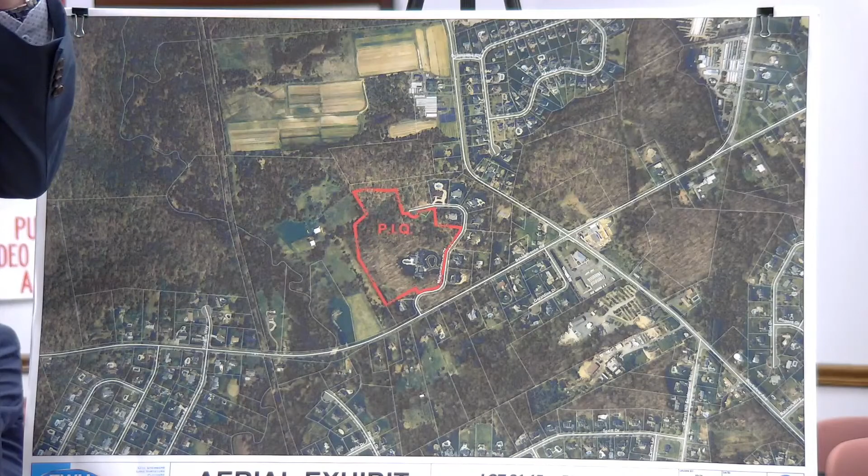We have a relatively simple application tonight. It's block 60, lot 21.15, in the Majestic Woods subdivision. Majestic Woods Drive runs through the subdivision off of Schoolhouse Road. The property in question is a single lot, indicated in red, this is a Google Earth aerial shot, Exhibit A1. As you can see, we have residential uses all around us, and the lot is obviously substantially oversized for the zone.

What we're proposing is to create 3 lots out of that single lot. We have no construction being proposed with this application; everything exists today that's constructed. The single-family house is going to remain on the larger lot. Then we have a subdivision of 2 smaller lots, and those lots will be solely for the existing drainage basins that are on the site. We're proposing to dedicate those basins to the township. Obviously we need council approval to do that, but that's why we're here tonight, is basically to subdivide those lots off.

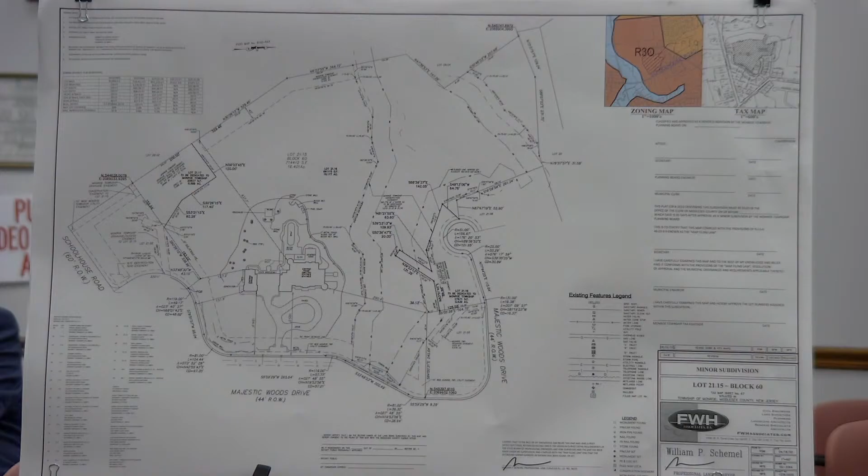As I indicated, there's no construction at all proposed with this application. The lot that has the house on it will be fully conforming after the subdivision, no variances, no waivers associated with that single-family residence. The variances proposed tonight are associated with the basin lots. So the 3 lots are lot 21.17, which will be a basin lot. Lot 21.18 will possess the existing home, and lot 21.19 will be the other basin lot.

The variances that we're proposing are lot area: 30,000 square feet is required. On lot 21.17, 25,627 square feet is proposed. And for lot 21.19, 27,671 square feet is proposed. Again, these are not building lots, they're just basin lots, stormwater management.

Lot depth, 200 feet is required. Lot 21.18 has 125.58. The frontage along the street for lot 21.17 is off of Schoolhouse Road through an access easement that goes back to the property. We propose to maintain those access points, but it doesn't have frontage on the street. But again, as I indicated, this is not the building lot, simply a stormwater management lot.

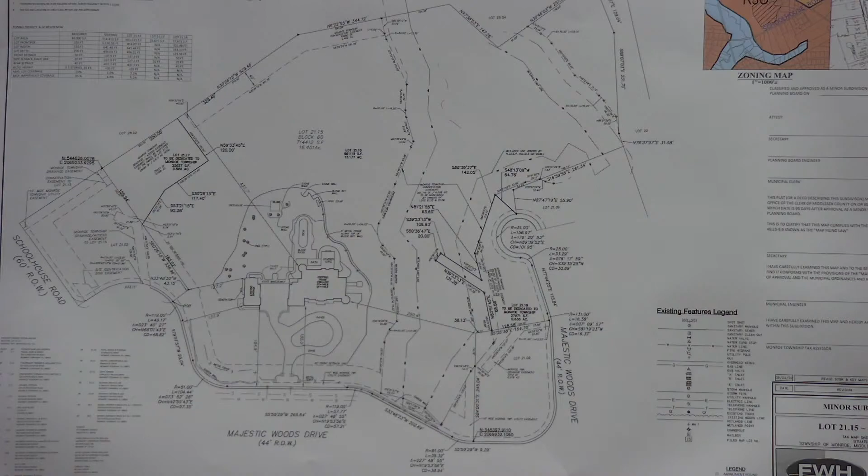Thank you, Mr. Murphy, for listing the variances. As you know, the no street frontage is more like a statute requirement, and one of the reasons is to make sure emergency access is always available. In your professional opinion, would that be provided with this lot?

The next question I have is, with the proposed lot numbers, I would recommend that be approved by the township tax assessor, just to make sure. And lastly, this subdivision is going to be filed by deed, is that correct? We may do it.

Either way, I think that would need approval from the board engineer as well as the board attorney. All right, thank you, that's all I have for now.

Mr. Chairman, the board's in receipt of my October 13, 2022 review letter. Just for the record, Ryan, you're agreeable to meet all the comments in my review letter? That is correct. And if this board approves the application, it's subject to council approval for the dedication of the stormwater basins to the township. That's all I have.

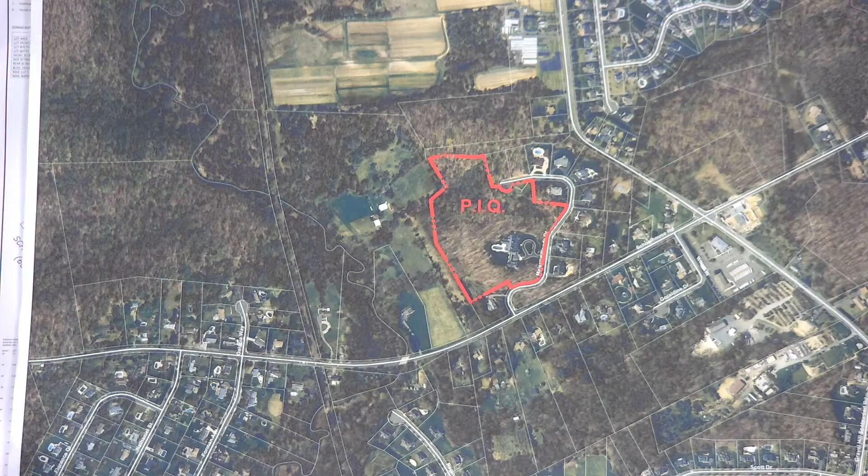Mr. Chairman, I'd just like to clarify that in the event the Township Council does not approve - which is probably not very likely, but in the event that may occur - I wanted it understood that this approval for the subdivision would not in any way allow for building on the two new subdivision lots. It's meant to be for the basins. There will be no building on those two lots in any way, shape, or form.

Anybody else? Do I have a motion? I would move to approve - sorry, open to the public. Any members of the public wish to be heard on this? Hearing none, do I have a motion?

I make a motion to accept the application as stated. Second?

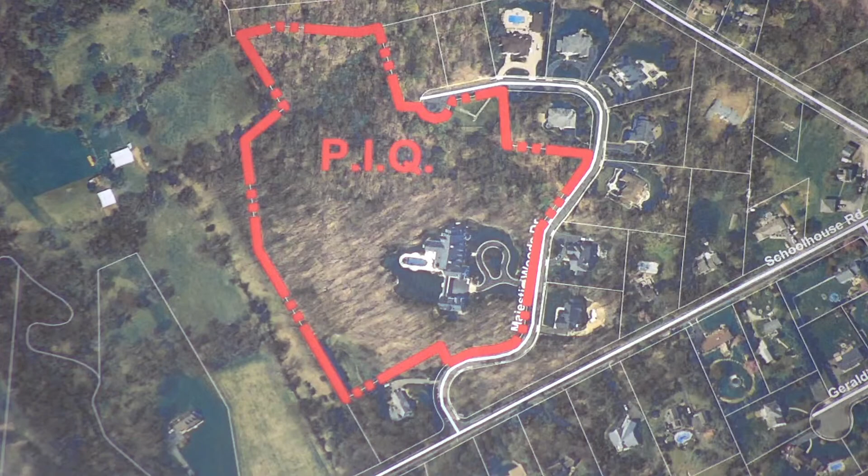Okay, the next application on the agenda is PB 1246-22, Apple Realty LLC.

Good evening, ladies and gentlemen. My name is Rosalind Westlake. I am here on behalf of the applicant, Apple Realty LLC.

With your permission, may I sit down? I'm sorry, I didn't hear you. May I sit down? Yes, please. We should hold off all those people coming in.

Thank you so much for your time this evening. We are here for a minor subdivision, although it looks like a humongous application. It really isn't—we are taking an existing functional shopping center that also has an office building on it and seeking to separate the two uses into two lots.

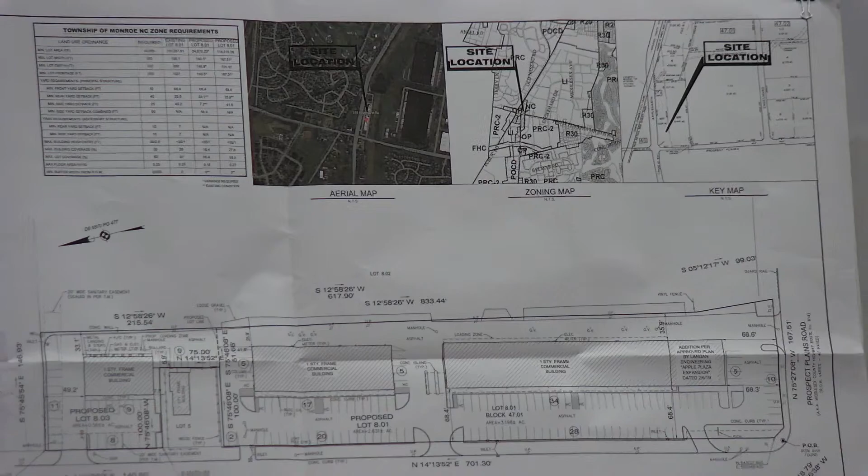Can you please give the board the benefit of your educational and professional experience? Sure, I graduated from Rowan University in 2006. I've been a licensed professional engineer for the past 8 years. I've appeared before approximately 50 boards on 250 applications, not before this board, but before the zoning board in Monroe on multiple occasions. Okay, unless there's any questions, I'll approve his credentials.

Great, thank you so much. Okay, so Mr. Wilder, can you let us know you're familiar with the site and the application and plans? Yes, I am. Okay, you prepared the plans? Yes, I did. Could you describe the existing conditions for the board, please?

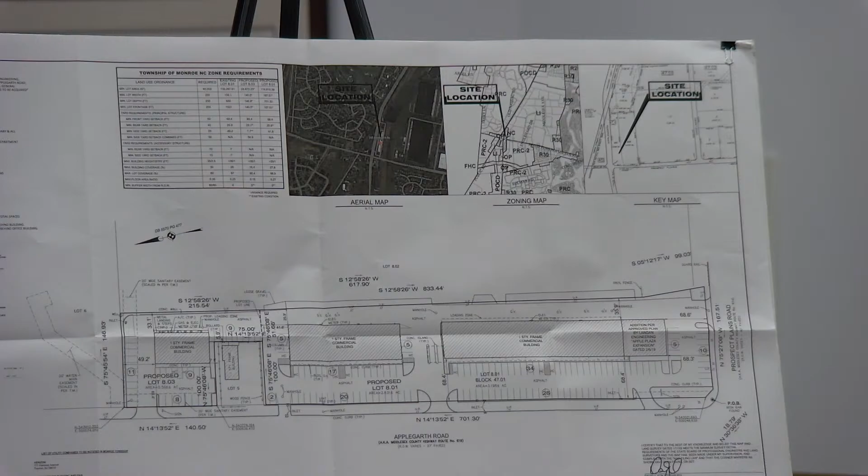Sure, and I have one exhibit that I plan to reference this evening, which I think makes it a little bit easier. I'll mark it as A1, for today's date.

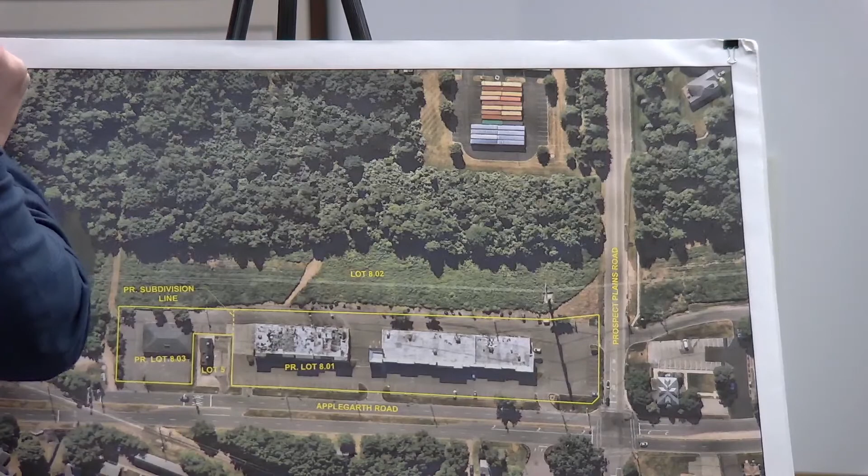This is an aerial exhibit prepared by my office dated 10/5/2022. This shows an aerial of the property. I've highlighted the site in yellow. These are the 2 retail strip center buildings on the south side of the property, and this is the office building we're referencing.

Ms. Westlake had referenced a sort of irregularly shaped portion of the property. You have a horseshoe in this area where it wraps around another adjacent property, lot 5. So what we're looking to do is drop a new property line separating the retail portion from the office portion.

There are no improvements proposed as part of this development. For what it's worth, when we prepared the subdivision plan, as this board may recall, there was a prior approval memorialized in 2021 for a slightly over 4,000 square foot addition. We've prepared all of our calculations, parking, coverages, assuming that addition was constructed, as that would be the highest intensity of development. So if the addition was granted and the lots were subdivided, the variances we are seeking this evening would be subsumed into that proposal.

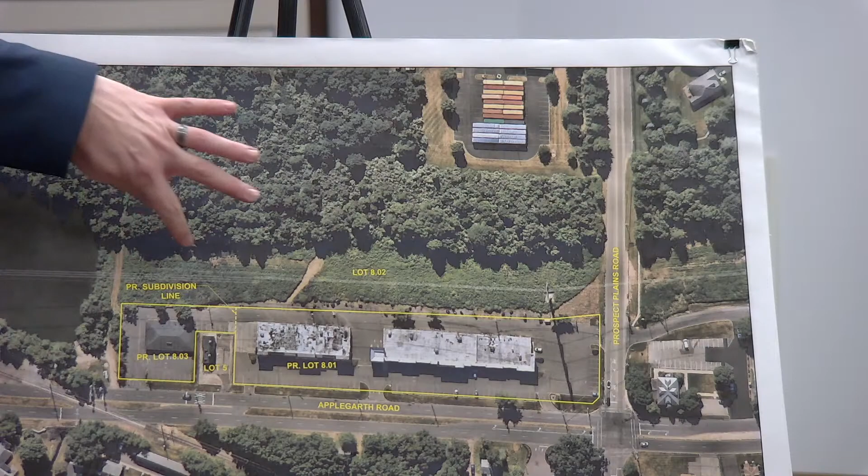So you can just highlight the line we would like to draw for the board. See this little dotted line right here? It's on the right side of lot 5, just extending that line straight up.

As a result of separating off the office building from the 2 shopping center buildings, that does have a little bit of an impact on the parking calculations. It impacts it in that it transitions where the parking falls. The number of parking spaces does not change, but it creates a surplus of parking on the office building and a shortfall of parking on the retail portion of the property.

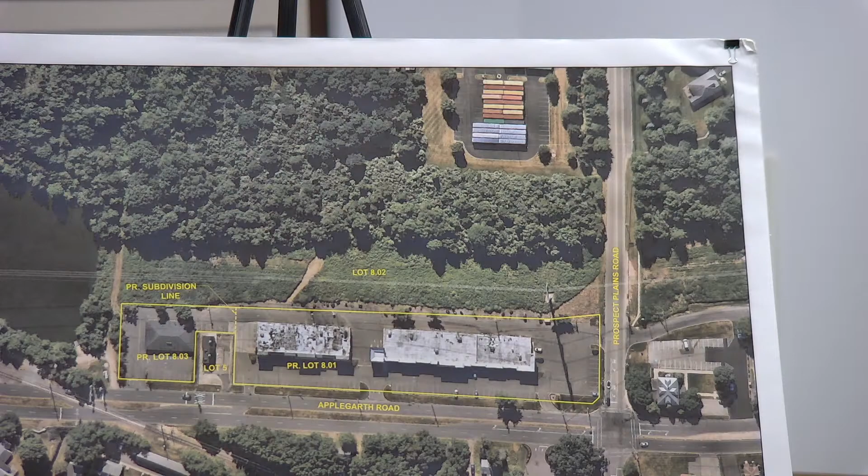Have you reviewed the staff reports from Mr. Rasimowitz and from CME? Ms. Aft is here from them. I have, and from the Environmental Commission as well. Can we comply with all the recommendations in those reports? Yes, we take no issue with those recommendations. In particular, I'll let the board know we are more than happy to do the cross-access easement recommended, as well as the shared parking/parking easement recommended by the planner and the engineer.

Do you have anything further to share with the board at this time? I don't. From an engineering perspective, it's always nice to say nothing's proposed. Okay, unless the board has questions for this witness, I'll move on to the planner. Professionals, do you have any questions? Thank you, Mr. Chairman. The board is in receipt of the November 3rd, 2022 engineering review letter.

The applicant has agreed to meet all the comments in that review letter. They have asked for waivers on submission of stormwater reports and traffic impact statements. I would concur with the waiver since they're only striking a line for financing purposes, and there's no impact to the stormwater or traffic. They've agreed to provide cross-access easements on both properties, and the proposed lot numbers need to be approved by the tax assessor. It's in my letter. I know there was some discrepancy on the plan as opposed to proposed lot numbers. Yeah, we'll do whatever the tax assessor says. That's really it. They've agreed to meet the comments in my letter.

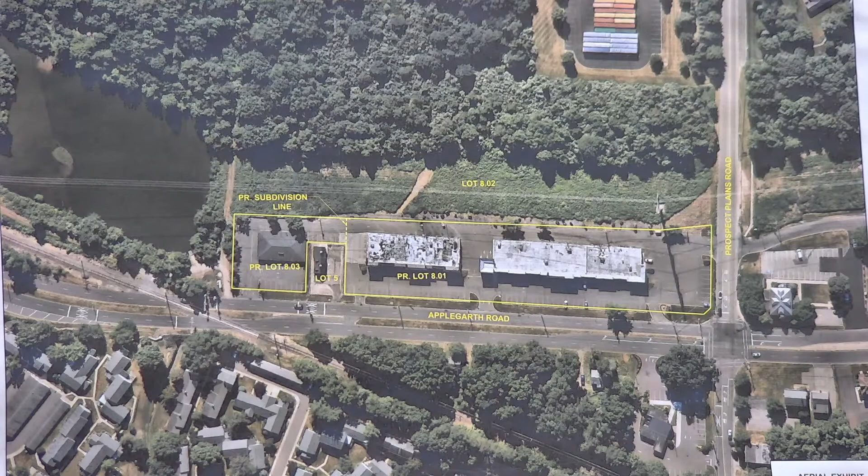Mr. Pelori, yes. Mr. Rothman, yes. Ms. Polidoro, yes. Ms. Brodsky, Mr. McGowan, yes. Mr. Patel, yes. Councilman Van Zorif, yes. Mr. Markel, yes. Chairman Gaffney, yes. Thank you very much.

Okay, I'm going to call the last application, PB 1247-22, and for purposes of full disclosure, in my practice I've had several cases with Mr. Lonsky's firm over the years, particularly with partner Mr. Shipers. I don't believe it creates any issues unless there's any objection from members of the board or Mr. Lonsky. Absolutely not, thank you.

Good evening, Mr. Chairman, members of the board. We're here on the application presented on behalf of Farrington Boulevard LLC, which recently purchased the property on the corner of Farrington Boulevard and Perrineville Road, which I know has been before this board in the past with other proposals. We're here to seek preliminary and final major site plan approval to construct a contractor storage facility on the property. There is an existing stormwater management detention basin on the site, and documented wetlands and conservation easements that constrain the developable area. The applicant seeks several variances and design waivers, many of which result from the shape of the lot, and also the fact that it's a corner property, so you're measuring off of both ends. But we'll provide that detail for you.

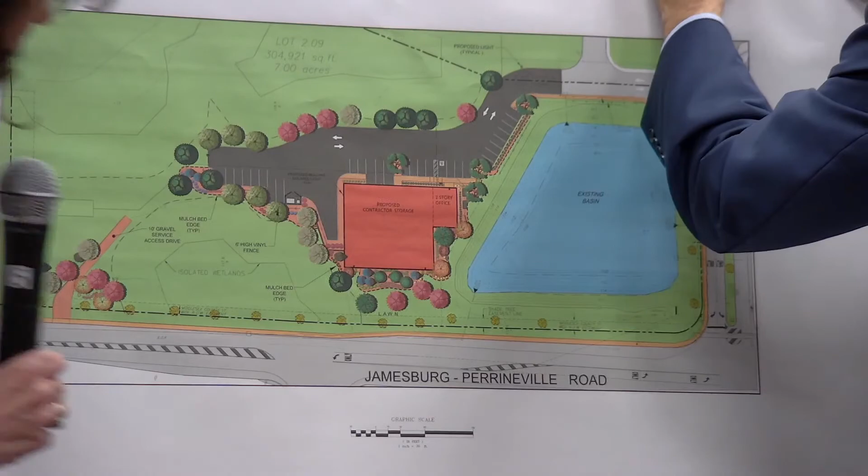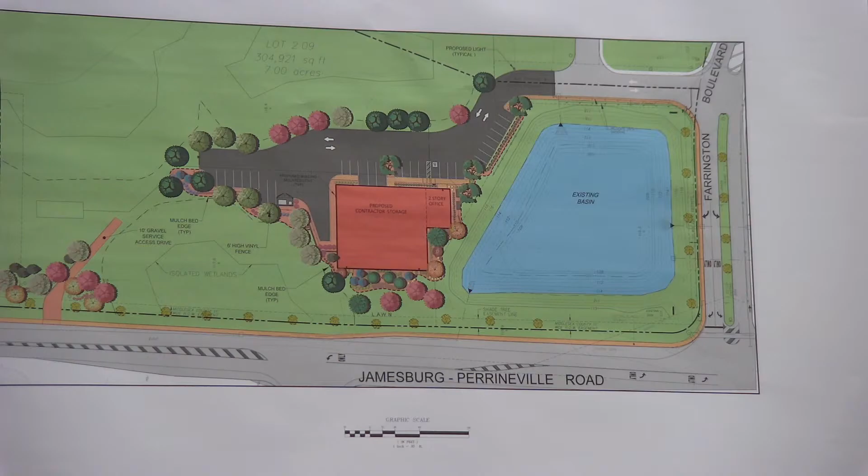I agree. Thank you. Okay, so I do have one exhibit that's not submitted, and that is this plan, which is a rendering of the landscape plan. I'm going to mark it A1. Please make sure it's dated today. I'll put today's date on it, 11/30/2022. The other plans are the paper set that we submitted to the board. Do you want them marked, or are they already an exhibit? If you're representing that it's exactly what was already turned into the board, I think that it's acceptable. Yes, it is. All right.

Can't do this by memory anymore. Okay, so the site is known as Lot 2.08, Block 8, and Lot 2.09, Block 8. It is located on Perrineville Road, which is Jamesburg Perrineville Road, along the bottom of Exhibit A1, and also Farrington Boulevard, which is along the right side of Exhibit A1. It is a corner lot. It contains wetlands within wetlands easements, which on my exhibit you can't see very well, but you could if you looked at the existing conditions plan. The lot contains about 7 acres, and about 2.78 of those acres is outside of the wetlands conservation easements.

And it's the wetlands and buffers whenever I say wetlands. Let's see. Located behind it, up to the top of the sheet, is the Monroe Tennis Center. Across the street, almost directly, this is the driveway, one of the driveways to it that you can see on this exhibit, is the Make-A-Wish. It's located in the south central portion, the central part of the southern part of Monroe Township. The lot itself was created as part of a 4-lot subdivision that received approval in 2000, and the plat was filed in 2005, I believe. There's the tennis center, which I always call it, even though it's the Monroe Sports Center, located on Lot 2.10 to the top of the exhibit.

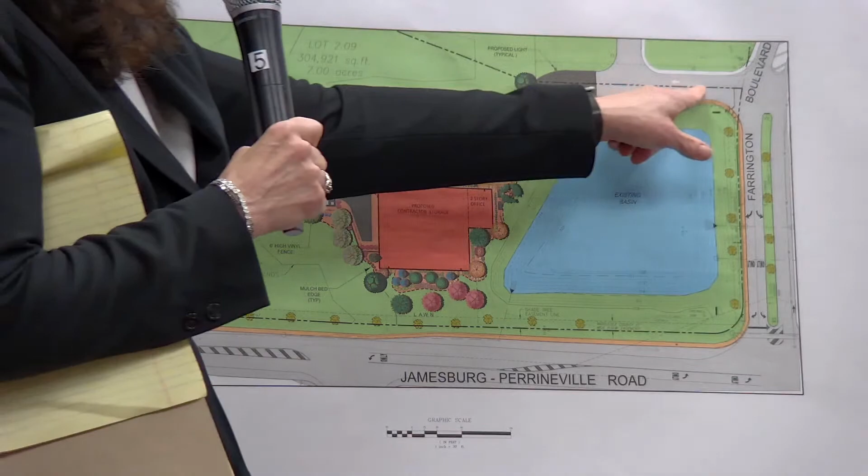There's an access easement located at the eastern side of the property that is split over the property line. You can see the black line, which is the border between lot 2.10, the Monroe Tennis Center, and 2.09, our subject property. There is an easement around that which has recently been enlarged. I'm not 100% sure if it was filed yet, but it's been enlarged to provide better ability for the association to maintain both the easement and the drainage basin, so they could get into it.

The property is quite flat. There's about 4 contours on it. It slopes generally towards the north and a little to the east, and not so much down to Perrineville.

The wetlands encumber the site all along the frontage, except for a little space right next to the detention basin, in front of it, and another little space over in this area, which is where the septic system would be located.

With regard to the proposal, the building is 2,880 square feet of office on 2 floors, split evenly, and the storage space referenced previously of 11,000 square feet. As noted, it's office and contractor storage.

There's parking facilities, stormwater management, landscaping, lighting, and utilities. There is gas, electric, and telecommunications utilities in Farrington Boulevard. There are also dry water and sewer lines. This area has no water or sewer yet, so it will be serviced by a septic system and well water.

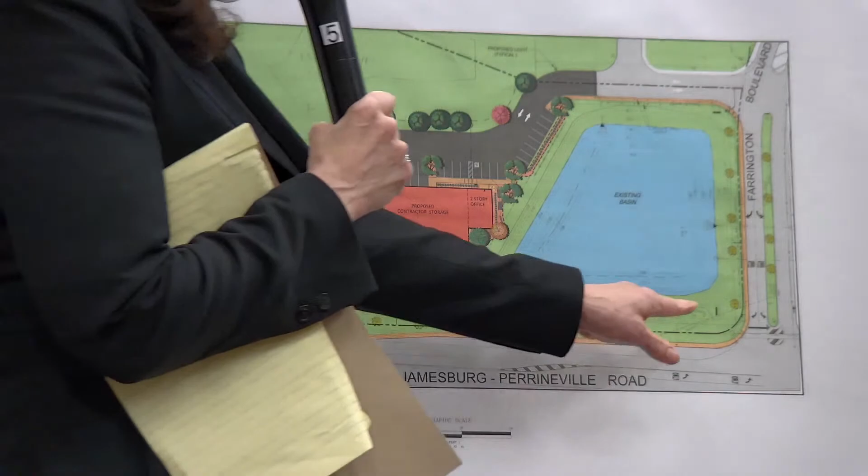There are signs. There will be 3 signs. One will be on the facade, and we're asking for 2 monument signs, one on each corner of the property along Farrington. The first one, along Jamesburg-Perrineville and Farrington, is proposed to be a monument sign listing both the Monroe Sports Center and this business, Tile Works. We've already had a meeting with the owner of Monroe Sports Center, and he's agreeable to that.

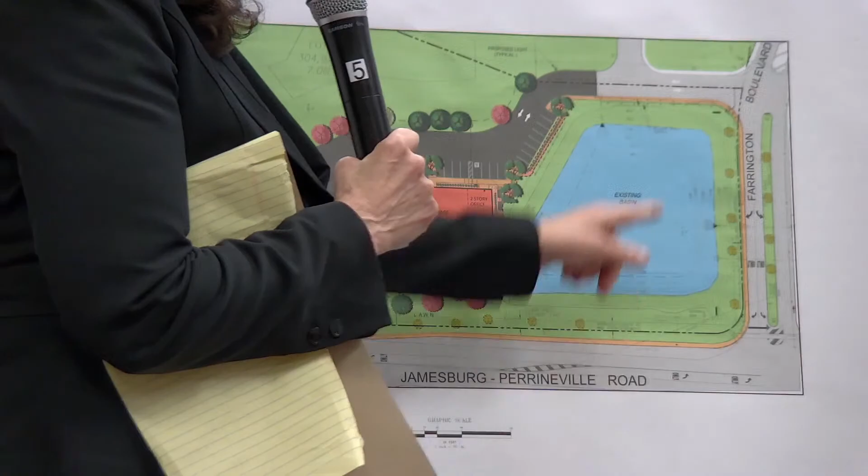With regard to stormwater, as mentioned before, there's an existing stormwater basin, a semi-regional basin. It was actually designed to handle 75% of this lot being impervious, which would equate to about 1.9 plus or minus acres. But we're only having impervious coverage of just under an acre, so this basin has plenty of capacity to handle this development, which it was designed to do.

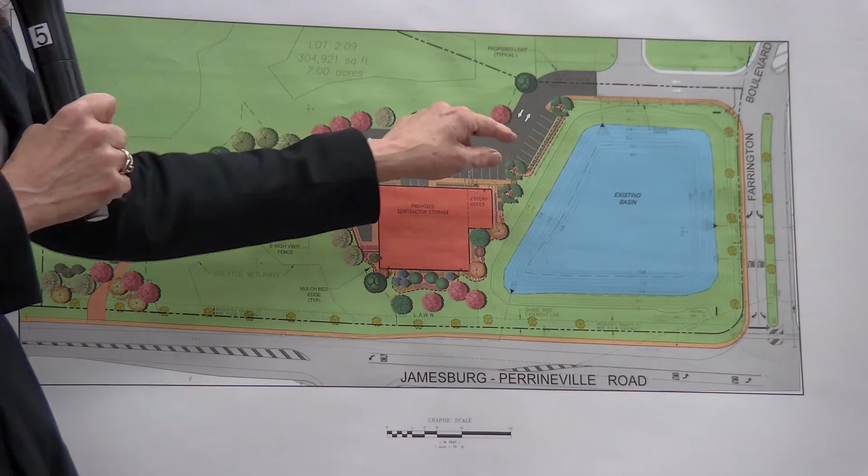One of the new requirements for stormwater management is that if you have a wet pond, it needs a secondary use, such as irrigation. We do propose, though it's not on the plan right now, to use some of the irrigation on site from the pond. The pond was constructed around 2009 and has never dried out - it's in an area where water comes up into it, plus what flows into it, so it's a good pond.

The rest of the stormwater management consists of porous pavement in 2 or 3 different areas of the parking lot, which is meant to provide water quality. Originally, the basin was supposed to provide water quality, but the newer regulations don't want you to do that. So in essence, this site is going to get double water quality - what the basin gives it, plus what water falling through porous pavement provides. There have been a number of studies, and if anyone's interested, the University of New Hampshire has done extensive studies on porous pavement in cold weather conditions, which you might be concerned about.

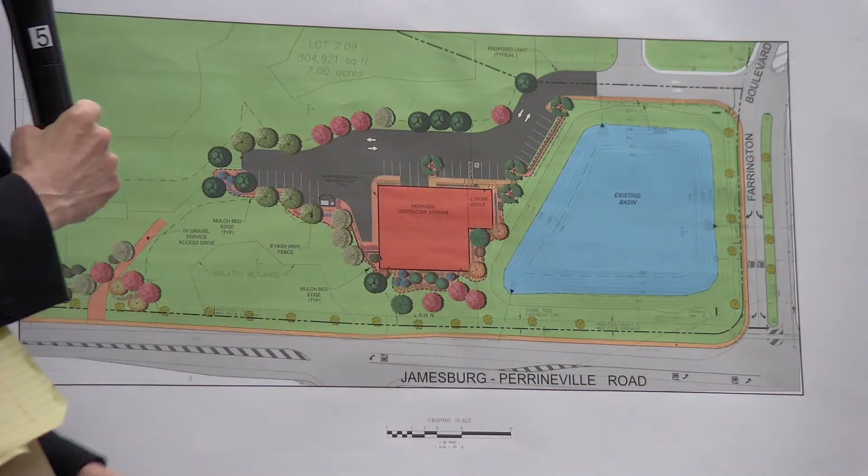Landscaping. As you can see from this plan, we're showing a lot of landscaping around the front of the property in the areas where we can. This area where it looks like there's nothing, that's because it's the wetlands or the wetlands buffer. We provided it to soften the look of Mr. Radosti's very nice looking building, as you will come to find when you see his presentation. As I said, we have a fence in this area to further buffer the street, the people on the street, from the parking areas. The other parking areas are buffered by the detention basin and pretty far from the street. So we feel that the landscaping is adequate.

It's a number of different sizes and shapes, and I can go through the list for you, but they are on the plan, varieties of plants. We haven't gotten shade tree comments yet, but hopefully they agree with our selections. There's some existing landscaping along the street, some street trees that were installed as part of that major subdivision.

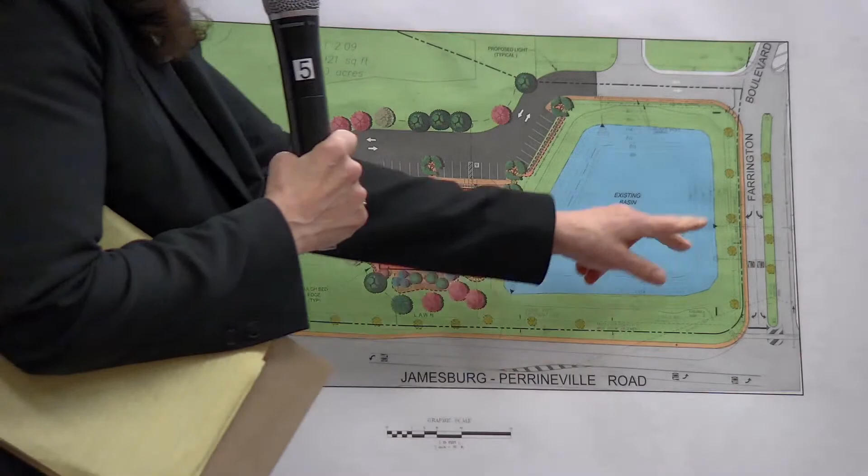With regard to lighting, there are 7 pole-mounted lights, one up on the corner, a couple around the parking spaces, one across from the building, another one down at the end, and there's 4 building-mounted lights that provide adequate light. I did note that there was a concern about the whiteness of the light. White light is 5,000 Kelvin, that's sunlight white.

And 2,700 Kelvin is soft light, the kind you might have in your living room. There's a recommendation to reduce it from, I don't know where it actually is, but it's higher than 3,000, to reduce that. I would like to work with Mr. Rasmussen to come up with the best plan to provide lighting.

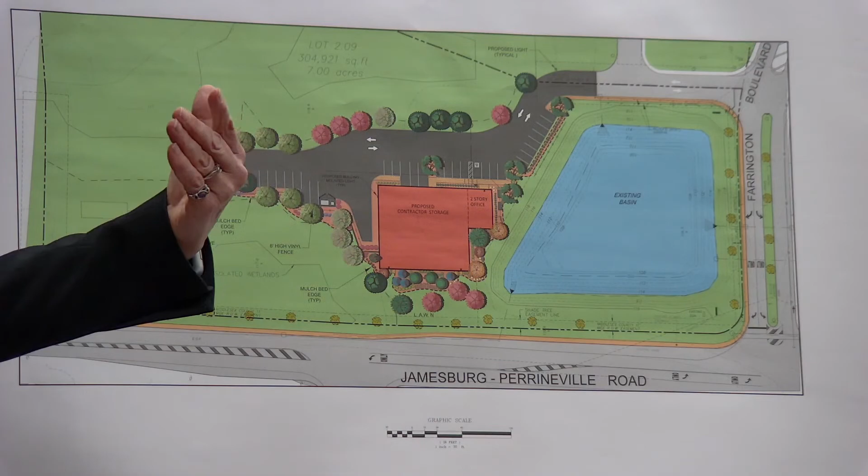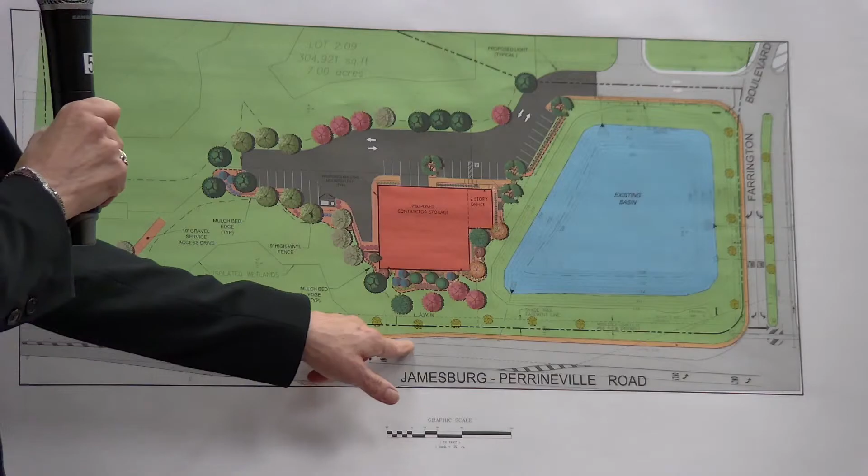Doesn't totally hide the building, but it will enhance it, right? There is no berm here because it's a narrow space, but it does have a lot of landscaping. The area of wetlands is slowly growing up, as you can probably see when you walk by - I'm sorry, I'm not looking down this way very often, my apologies. So I think when you see what the building looks like with the landscaping, it will be very nice. For a person driving along the road right in front of the building, your eye goes up and you won't see anything beyond the building, which will be further described to you shortly. See what we got, thank you. You're welcome.

Chairman, a very quick question. You talked about the soil erosion and sediment control - did you get the DEP permit approved yet? A DEP, we don't need any DEP water management permits. Are you talking about the permit that goes along with the soil erosion? You usually don't do that till just before you get ready to construct.

No, Terry grabbed my berm question ahead of me, so we're covered. Anybody else have a question? Anybody from the public have a question?

Hearing none? Chairman, go. Just to pick up where the councilman and Mr. Rothman left off on berming and landscaping, you'd be agreeable to provide supplemental landscaping upon installation and inspection by our board planner and my office as well? If there's some gaps that we could fill in, sort of enhance that buffer area, since you're not putting a berm in and you're looking for that variance. Yes, absolutely. Thank you.

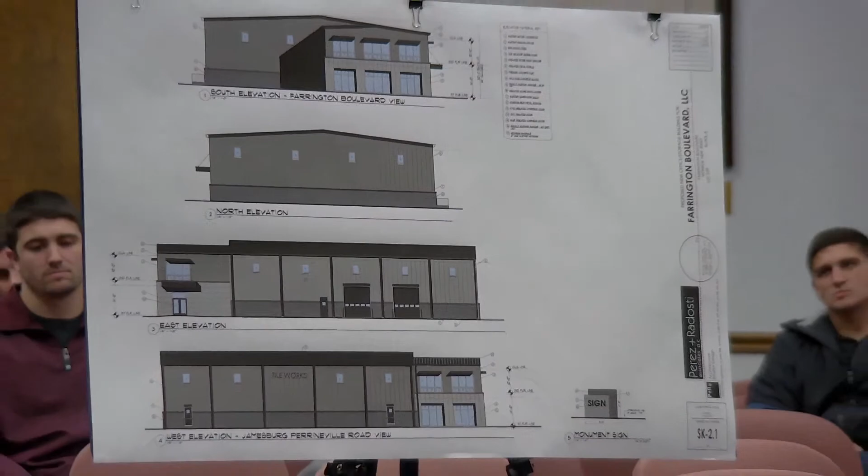And can you give your credentials? Yes, I'm a licensed architect in the state of New Jersey. I graduated from New Jersey Institute of Technology in 1992 with a Bachelor of Architecture. I've been licensed since 1996 in New Jersey. I'm a principal at Perez and Radosti Architects for the last 20 or so years. I've presented in front of dozens of boards throughout the state of New Jersey. I've not presented in front of this board, however I presented in neighboring towns like Millstone, Cranbury, East Windsor, East Brunswick, Manalapan, Marlboro, and many other close towns.

Thank you. Unless there's any objections, I'll accept your credentials. Thank you. Well, what was yours? Well, I have a total of 4 boards. Were these already submitted or are they?

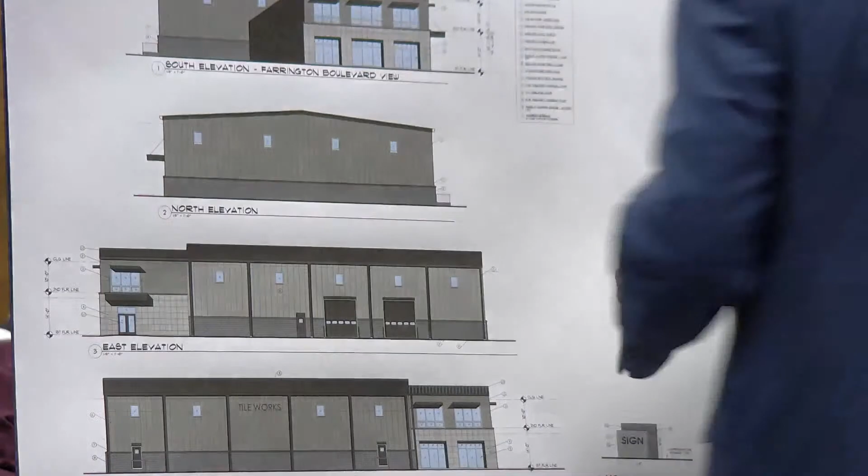Two of them were colorized versions of what was already submitted, and the other 2 are new, completely new exhibits. Why don't we just mark all 4? Okay, you had A1 already - SK 2.1, static elevation, dated 6.8.22 on it.

Have the SK 1.1, colorized version of the floor plans that were previously submitted. Date on those drawings is also 6.8.22.

I have a new exhibit labeled SK 3.1. This is a section and monument sign, and this drawing is dated 11/28/22. That'll be A3.

So the proposed building is an office storage building for the applicant, consisting of 2,880 square feet of office on 2 levels and 11,000 square feet of contractor storage.

The mic he's speaking to is not working. Try the cord at one. This one works. Okay, let's try that. Is this better? Yeah. Okay, all right, let me start over here.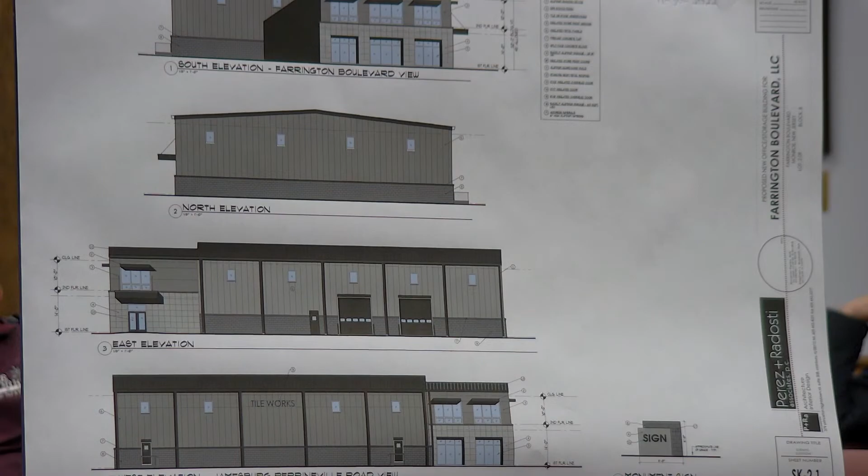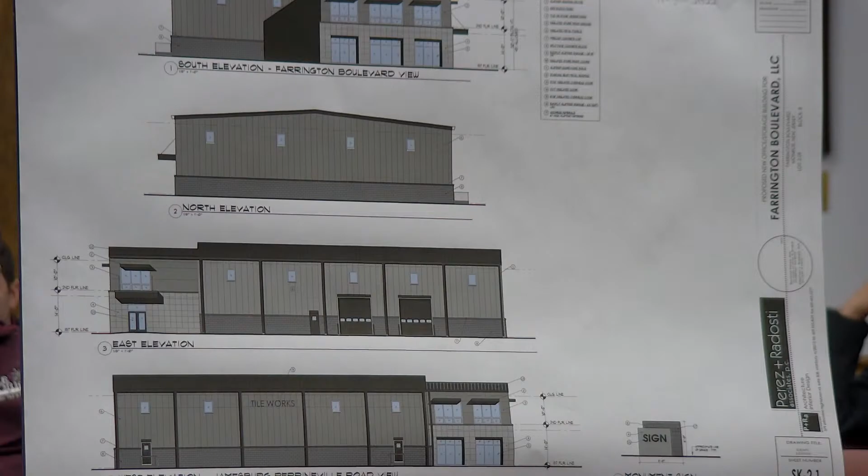It consists of 2,880 square feet of office on 2 levels and 11,000 square feet of contractor storage on 1 level, for a total of 13,880 square feet. The building is non-combustible construction made of steel and concrete construction and is approximately 31 feet tall to its peak. The majority of the building is clad in pre-finished insulated metal panels over a split-face block water table of approximately 6 feet in height. The water table is topped with a precast concrete cap.

The office portion of the building is clad in a tile or stone veneer to allude to the type of business that is inside and to draw attention to the entry area. This office area includes lots of large windows to allow natural light into the space. The upper windows include metal shading devices to keep down glare and solar heat gain in the interior space. The front entrance is punctuated by a large cantilevered metal canopy that coordinates with the metal shading devices.

The storage space includes clerestory windows up high to allow natural light into the storage area, and these windows go around the perimeter of the building. The building has a pitched standing seam metal roof, and all the facades of the building are color coordinated with varying shades of gray. On the west facade of the building, we propose backlit LED aluminum signage of 20 square feet. This is approximately 1 foot 4 inches by 15 feet long.

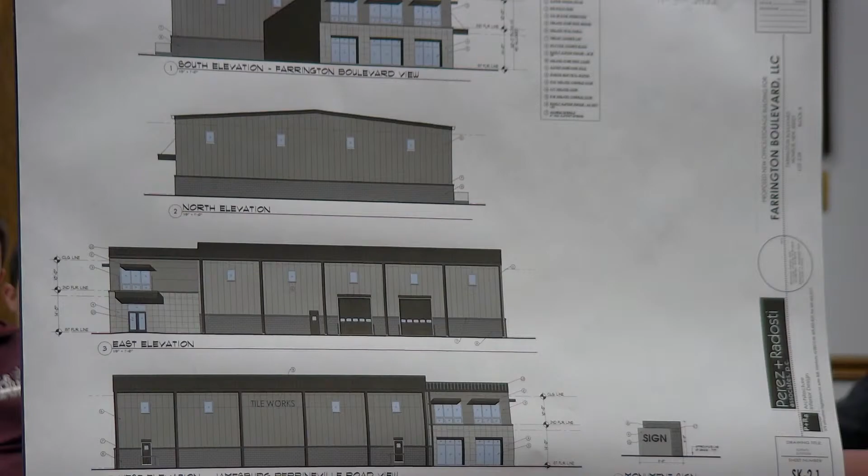So this is sheet SK 3.1.

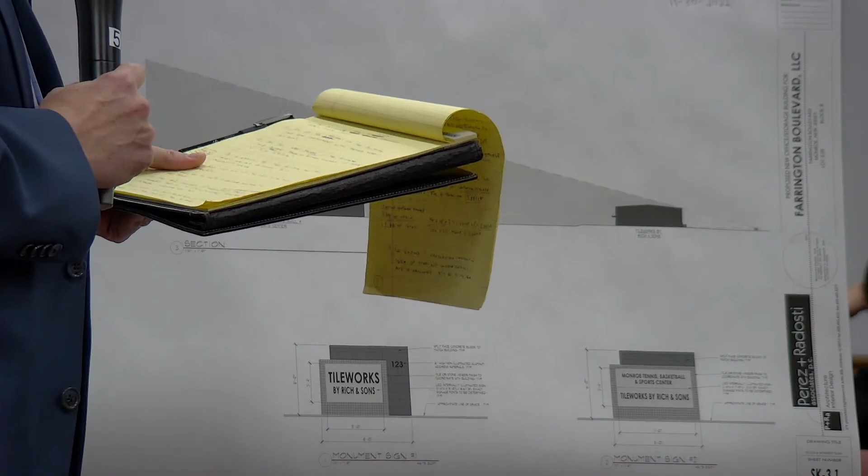A3. So in addition to the building mounted signs, we're proposing 2 monument signs. Both of these signs are the same size and materials. Each sign is 6 foot in height by 8 feet long and shall be 46.75 square feet.

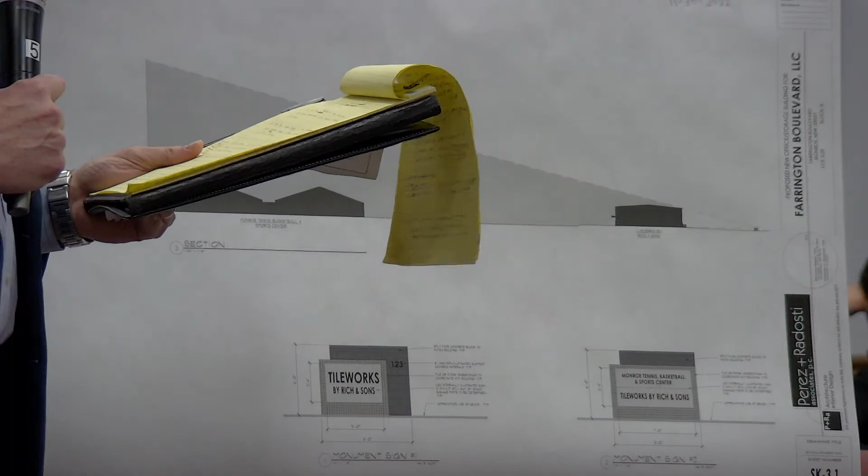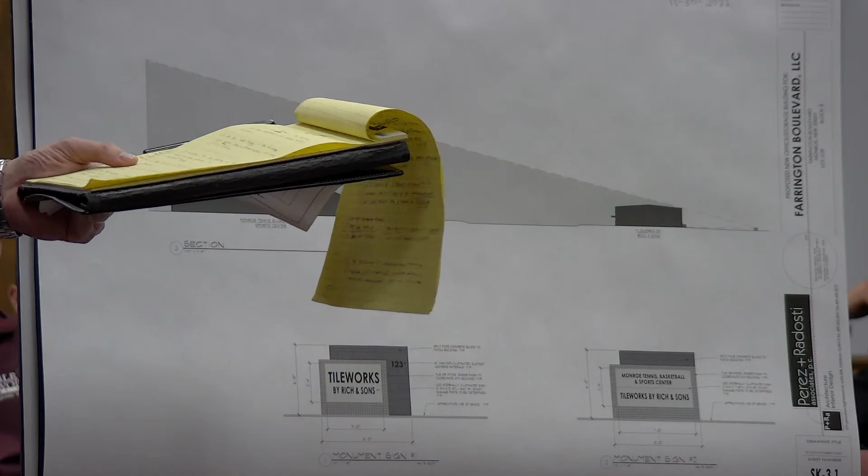So sign number 1 includes a 6 foot high, non-internally illuminated, 6 inch high street address up in the upper right-hand corner here. And then it also includes a 3'4" high by 5 foot long internally illuminated sign box. This would be the sign that would say Tile Works by Rich and Sons. The materials are split face block and tile to coordinate with the look of the building.

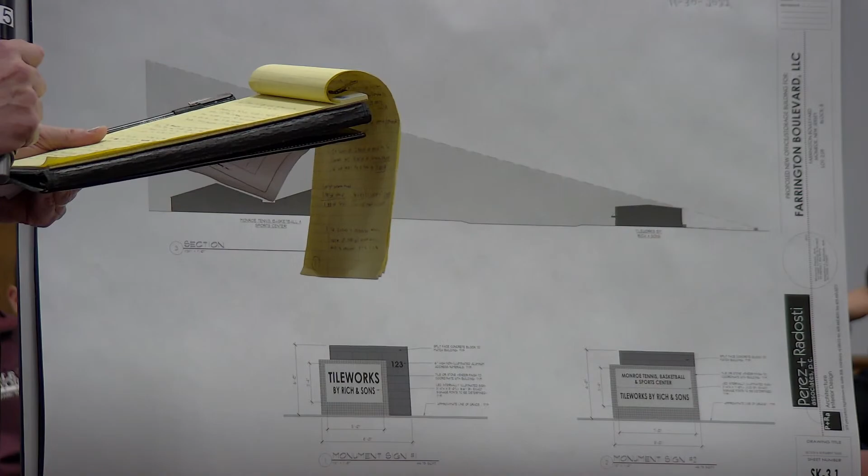Sign number 2 is of the same overall size and materials as sign number 1. However, sign number 2 will include a 3'4" high but 7 foot long internally illuminated sign box that includes a sign for the applicant as well as a sign for the neighboring Monroe Tennis, Basketball, and Sports Center.

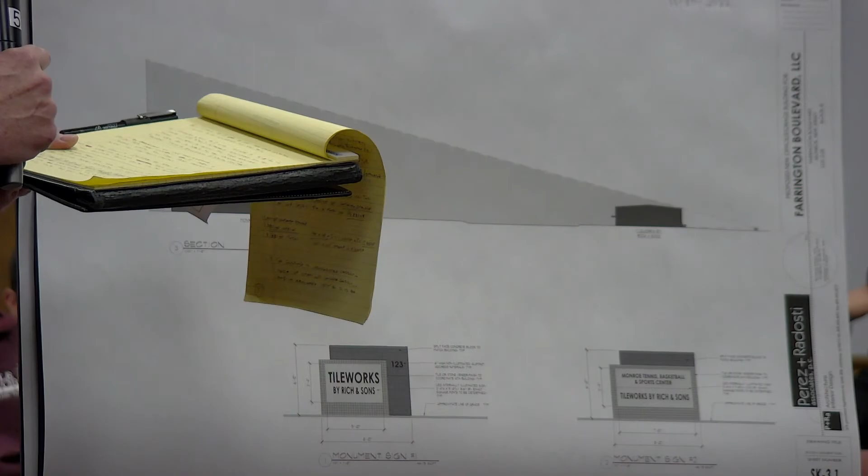As requested at the TRC meeting, I also have on the sheet a scale section cutting through the site. If you see this little tiny car right here, this is a pretty small scale. It's 1 inch is equal to, 1/32 of an inch is equal to a foot.

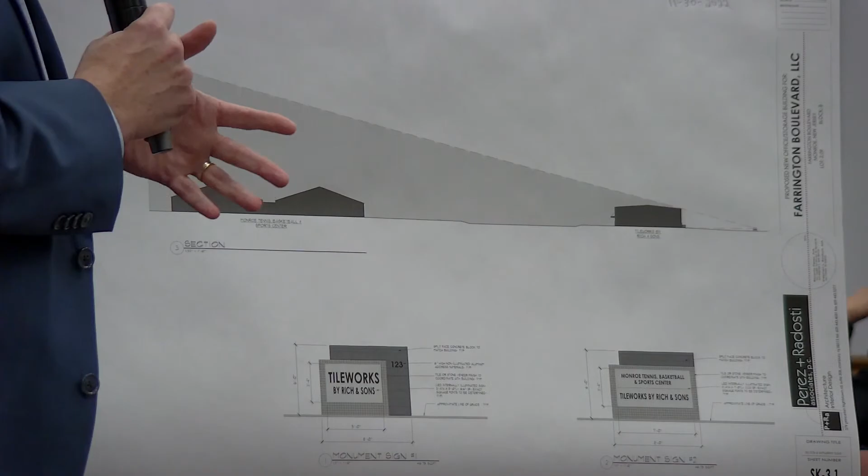So from the car on the road, if you're immediately in front of the building and you looked up towards the building, if you're within the width of the building itself it would block the view of the Monroe Tennis, Basketball, and Sports Center, which is shown here in the back. So it's a scale section showing that.

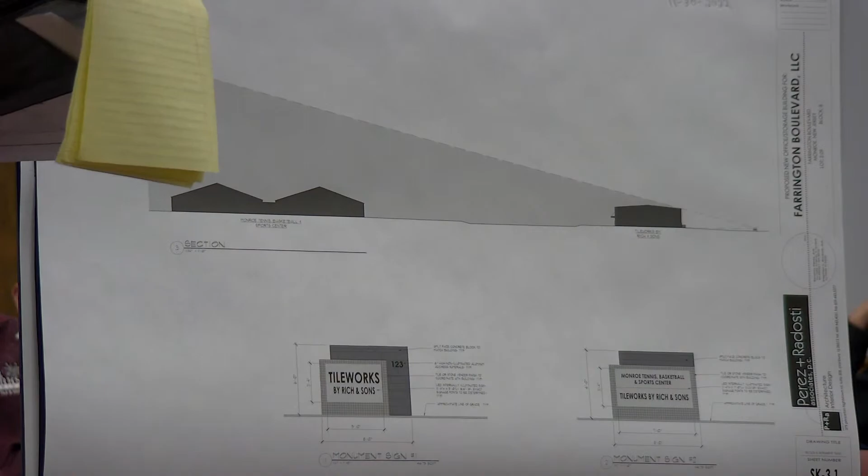So I believe that our building does meet the requirements of the building design standards of section 108-12.3. Most of our exterior materials are mentioned in paragraph E1. However, the split face block isn't specifically mentioned.

However, I feel that the dark gray split face block does coordinate well with the design of the building. It adds a water table that visually anchors the building to the site. The horizontal lines of this rough face of the block contrast nicely with the smooth vertical metal panels to create visual interest on the building. The block is also functional in nature, in that it will provide a strong wall finish at the lower portion of the warehouse that can stand up to more abuse than the metal panels, so it won't get dented or damaged from the inside of the building.

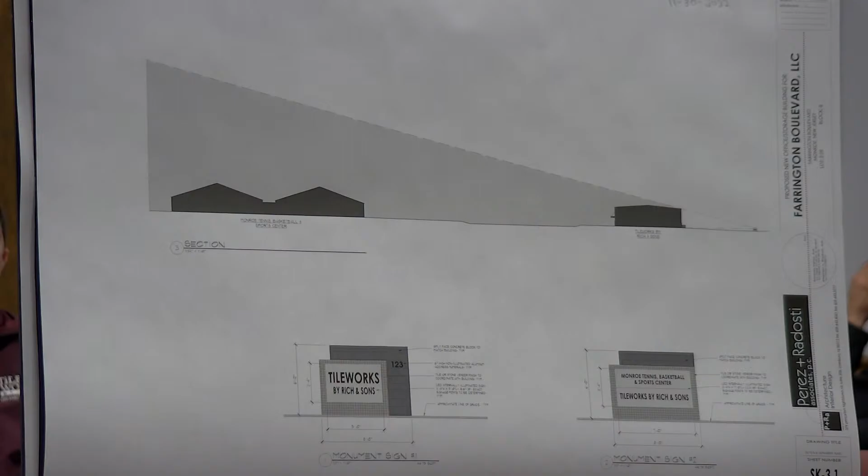I have here some photos of split face block on some other buildings. And this is exhibit A5 with today's date. I just wanted to show that split face block, if used correctly, can be an attractive material.

Here it is shown as a water table. It's actually a dark block, kind of similar to ours, and it's shown in contrast with a smooth material. I think that contrast will work nicely on our building and also provide some function. This split face block is pretty similar to our color also, and it's shown there with gray metal panels, and I think it makes a nice contrast there too. So I think it's the ideal material for this.

So I think that concludes my presentation.

You're able to see what he... I'm going to turn that, or just hop the other side. There you go. Mm-hmm.

Okay, for the professionals, any questions?

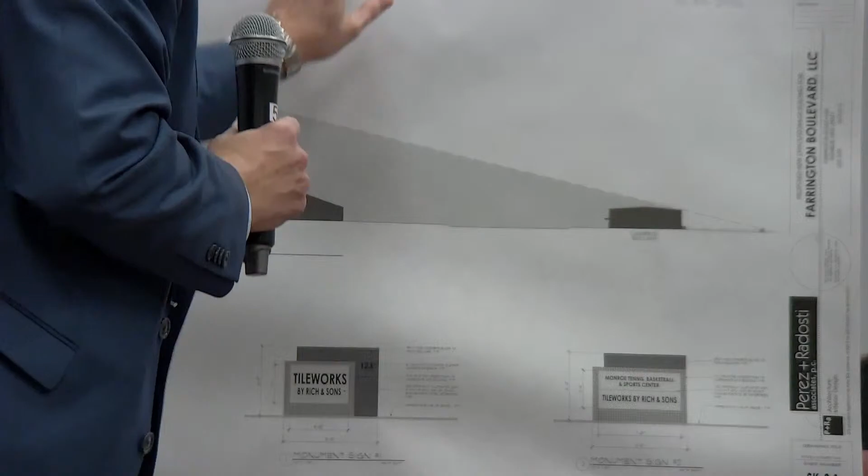Quick question. Could you again clarify where the wall sign would be on the elevation? Yes, of course. I have one wall sign, and it's on the west elevation, and it's facing Jamesburg Prospect Plains Road.

Yeah, so as you go down the street, you would see it here. It's a small sign, it's 20 square feet in size. And that's also, I guess, backlit LED lighting? That is backlit aluminum letters, yes.

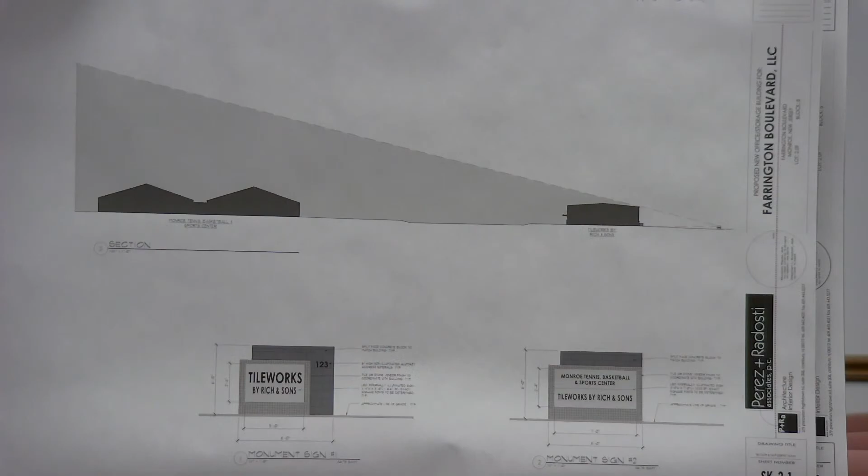So coming back to the point, I think you've heard the discussion tonight. In your professional opinion, given that there is the monument sign that's being proposed at the intersection of Jamesburg, Prospect Plains, as well as the wall sign, which is lit, would that be identifiable enough signage for anybody accessing the property?

Well, I mean, this sign would be the sign located at the corner, and it has a street numeral, so it would be helpful for people for navigation purposes to see the street address as well as for emergency vehicles. It would also have the name of the business, and then once you turn onto Farrington, at the next intersection, there's the second monument sign.

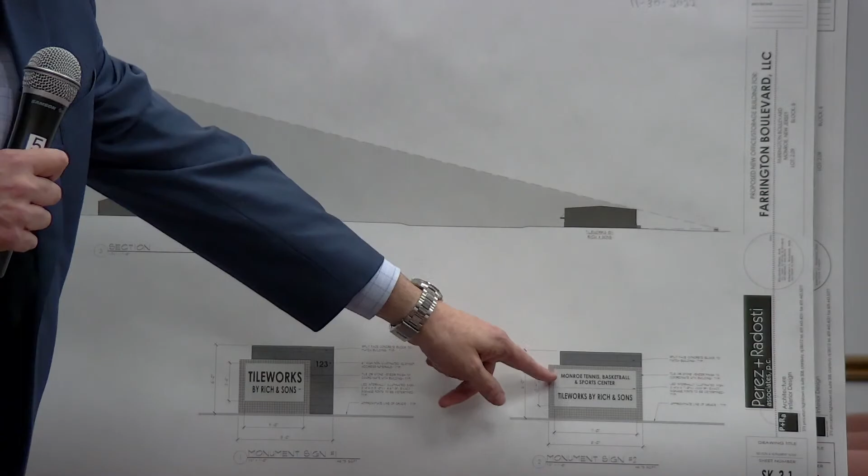This monument sign helps wayfinding for Monroe Tennis, Basketball, and Sports Center, as well as knowing that you would turn in there for the Tile Works project. Okay.

The number 123, that is not lit, right? I just have 123 because I don't know the exact street address yet.

Okay, that's not lit. No, that is not lit. I would defer to the board. However, if the purposes are met with two signs, I would recommend that.

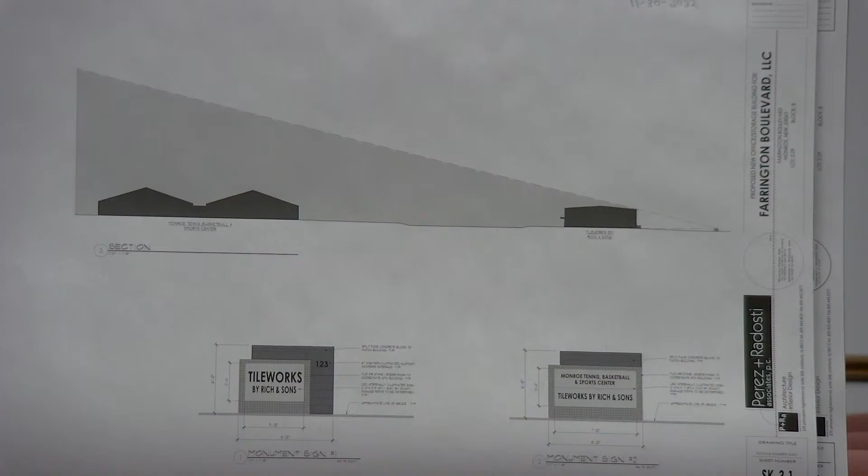In terms of the building materials, thank you for clarifying that. Are there any green building design materials being proposed? There would be green building materials, yes. The building would use some recycled materials, materials produced within 500 miles of the site. There would be LED lighting, low-E glass, and solar shading devices over the windows on the upper floors. We're going to have an efficient HVAC system. There'll be several items.

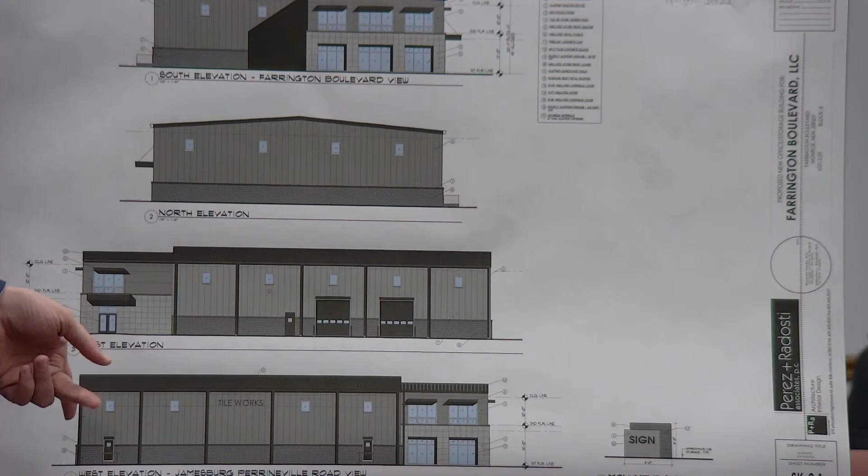Thank you. Where would the mechanical system of the HVAC system be located on the property? In the warehouse itself, that area is going to have heaters inside the building. There will be heat and air conditioning in the offices, and there would be probably a ground-mounted small unit in the rear of the property.

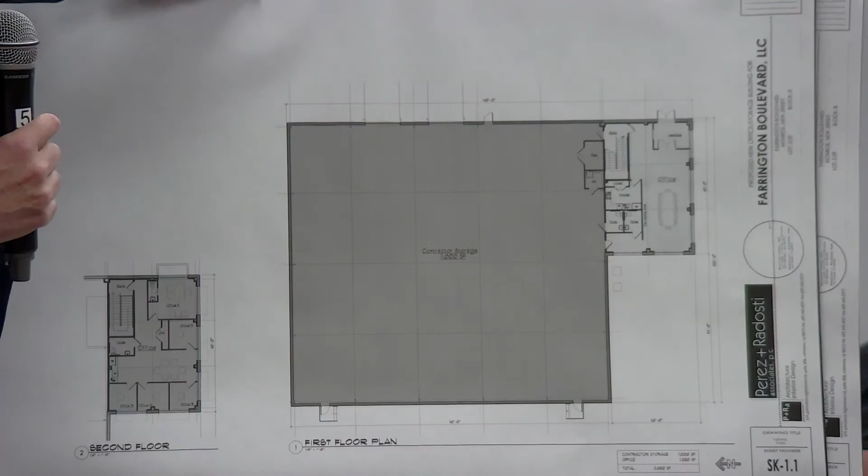Where's that in relation? So somewhere along this area here. The office area is relatively small, the size of a house, so it would be just a small condensing unit.

Is that condenser unit, those two squares shown? Right, here. I would recommend that your office or the engineer's office works with us, because that would be facing the Jamesburg Prospect Plains Road, if some kind of landscaping can be provided around that. Yes, we'll work with you on that. Thank you, Chairman.

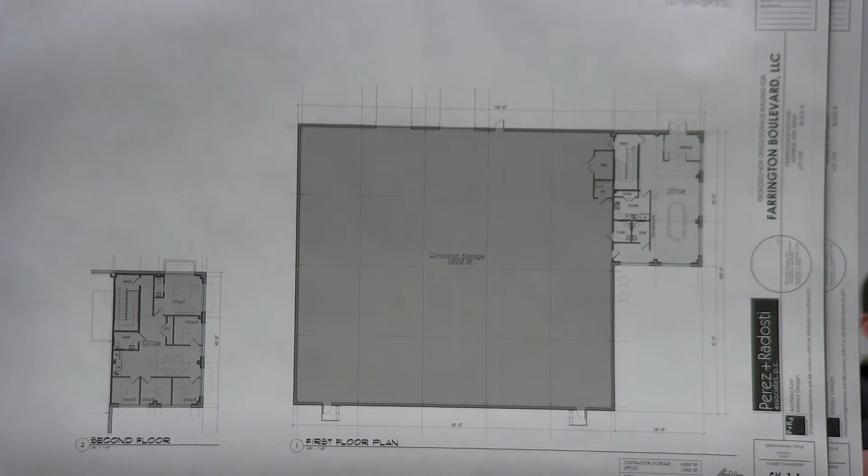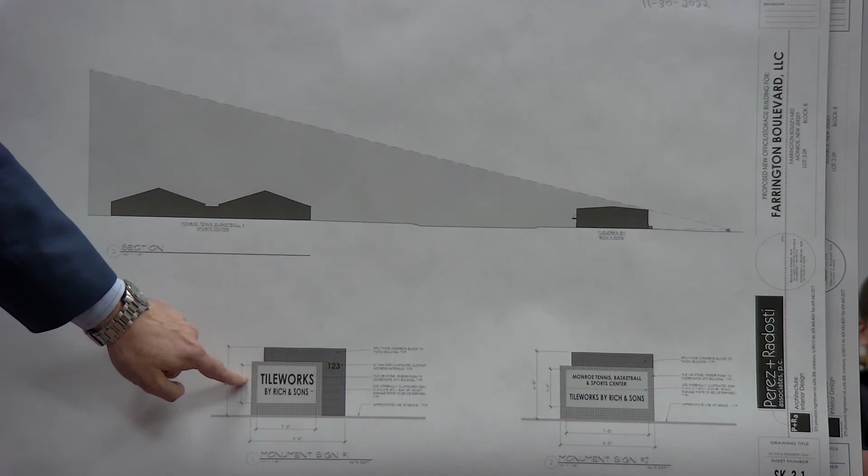So with regard to the signage, with both names on the sign, is that going to be at the intersection of Perrineville and Farrington? It'll have both names, the Tile Works and the Tennis Center, or Sports Center? The one with both names would be at the intersection of Farrington and Perrineville, and the other sign would be on Farrington, correct? I think it's the other way. The sign with two names on it is on the corner of Perrineville Road, and the other one's at the access point, as you come off of Farrington into the driveway. Okay, so let's start with the one on Farrington and Perrineville with both names on it.

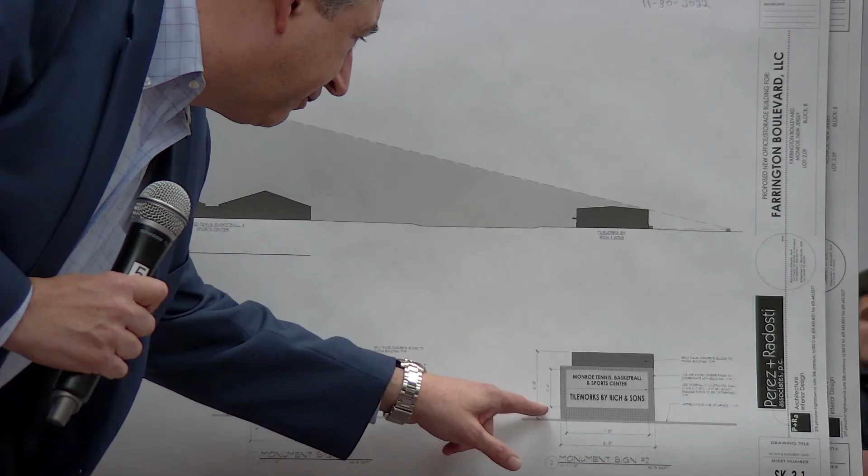Is that area of the sign lit up? Yes, that's correct, it is internally illuminated. So I'm concerned with glare from that light, you're at the intersection and the brightness of that. It's a very large area, I think you said it's 7 foot by 3 foot or thereabouts. Yeah, 7 foot by 3 foot, and I understand it meets the zoning, it's highway development zoning. However, it's Perrineville Road, you're right at the intersection.

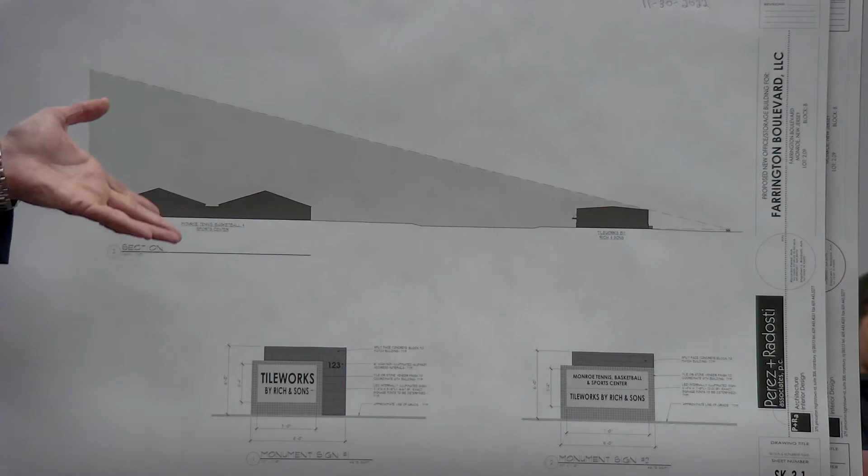Can you tell me about the lighting inside, how bright it is? Is there going to be an impact on the cars trying to make the turn? It would be an LED, internal. It would be an aluminum sign box with acrylic face, and it would be LED lighting, internally lit.

So again, I'm concerned with how bright that's going to be at the intersection, as well as the other sign, the single business sign at the other corner, which looks a little bit closer to the intersection there. Same thing, the brightness of that area. It's a very large sign. Do we need that large of a sign for a business that the public is not coming to?

The public will be coming to the tennis center, of course. Understood. Does the sports center have a sign with their own name on it at the other driveway entrance off of Farrington?

Just to clarify, I asked my client whether or not the sign that only reflects Tile Works, the second sign as we've been describing it, does not have to be internally illuminated. Because we appreciate what you're saying. As far as the other sign, to the extent that you want to work with our engineer or professionals to make sure the lighting isn't too bright, we don't have a problem with that. We can make that a condition that it satisfies the engineer in that regard.

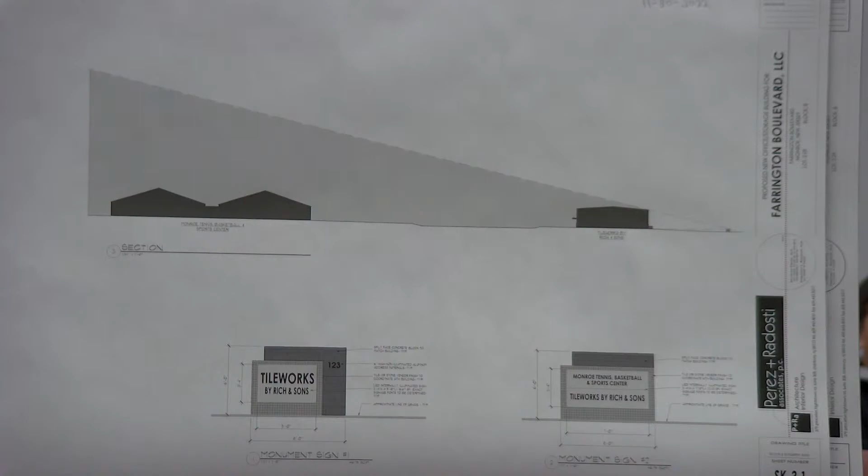But I did want to address one point, and that was the sign on the building, which is facing Perrineville Road. If you're making a delivery and coming from Route 33, where a lot of the truck traffic comes through, up Perrineville Road, by the time you see that sign, you're already past the building. That's why having the sign at the corner makes more sense, that's where the traffic would be turning into the facility. And of course, the signs are for traffic purposes.

I think the relation was that's why the second sign, the one we're calling the second sign - what is that doing if this sign is going to alert truck drivers? It's just directing you into the roadway, the actual roadway into the building.

I don't believe the sports center has a sign at that intersection. Would they go on this sign as well, a second sign? I thought they had a sign there on the other end. They have a big sign - the sports center has a big sign on their building, almost half of the side of the building. They probably don't need a little monument sign because literally half their building is a sign.

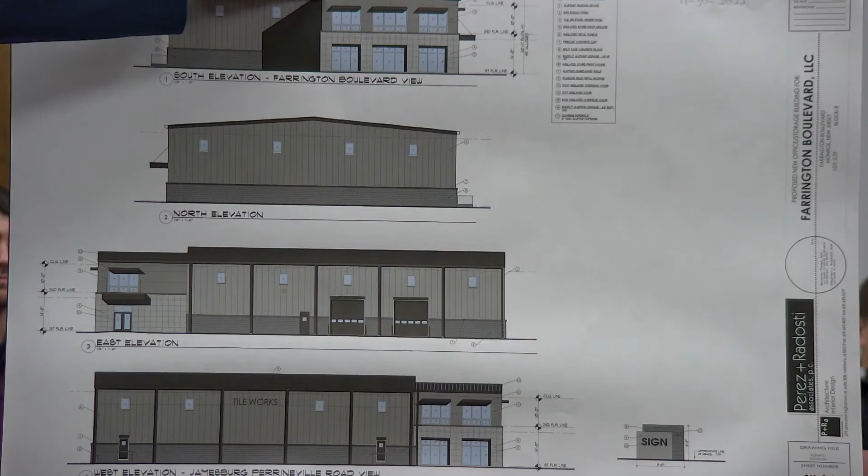Didn't you say one of these signs was replacing their sign on the road? The corner sign? Just to clarify, on this corner there's an existing sign that may not have been previously approved. The tennis center is being asked to remove that sign, and the sign we're proposing would replace it and be on this corner. The tennis center has their signage on the building, so it's very easy to see where they are from Farrington.

But because of the vegetation surrounding the existing basin, a vehicle coming up Farrington wouldn't know to turn to get to Tile Works. That's why that second sign is being proposed on the corner of the access road and Farrington, so a delivery vehicle would know how to get to the facility. That was the purpose behind having two signs there. Again, the second sign is what I was referring to with the access road.

If it makes more sense and the board prefers it, that does not have to be internally illuminated. Thank you for clarifying - from my standpoint, I understand the sign at the intersection of Farrington and Perrineville. It'll have both businesses on it. It makes sense, they have an illegal sign there now.

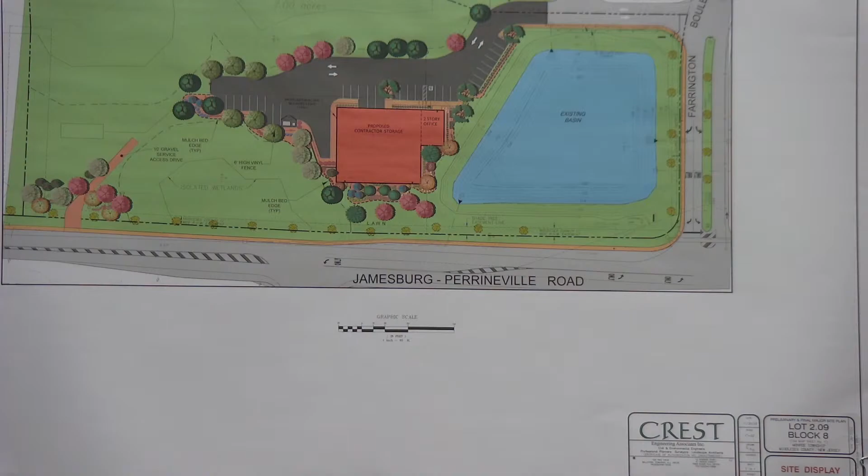You're not seeking any variance for setback from the property lines for the signage, are you? No. However, the other one at the driveway entrance off of Farrington looks close to the intersection, close to the curb lines. I appreciate you eliminating the illumination as you agreed to. Again, it just seems like a very large sign to have there, and my concern is the sight triangle for people at that intersection.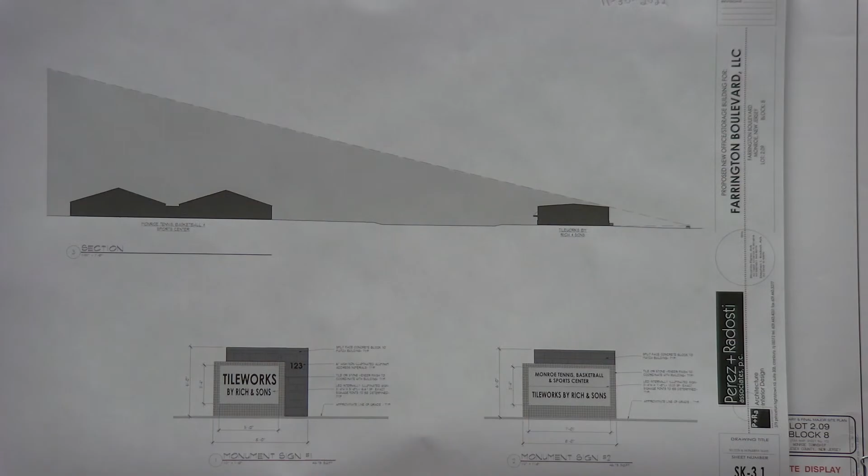Size? If I understand what your question is, just want to make sure. My bad - so I believe this engineering drawing shows the sight triangle, and you'll see that the sign sits behind it, so it's not interfering with that.

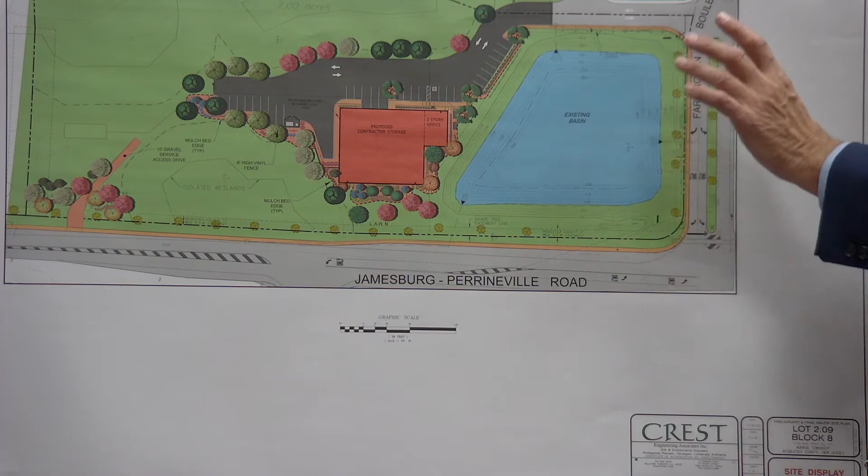I just want to point out, with respect to the second sign again, that truck traffic also comes the other way into the site. So it's not only people coming from Perrineville Road, but also from the Amazon warehouse end of Route 33 down Farrington - that would be the first sign they see for Tileworks to be able to turn into the driveway. So we're trying to facilitate traffic going in each direction.

Well, I still think it's close to that intersection and could be pulled back some. As far as truck traffic coming from the other way, I believe there's a truck restriction for trucks coming out of the warehouse toward Perrineville. I don't have a problem with making sure it's safe.

Your office should make sure that the sign is located in an area that directs traffic appropriately and also provides for safe clearance on the sight triangle. Comfortable with that, Mr. Chair? Any questions? Hearing none - I have a question.

What color is the sign on the building gonna be? You said it's back illuminated, but is it gonna be like a white sign or blue, or what? Don't have the exact colors. Do you know what colors you're gonna have on your sign? It's on the building, so it's not gonna be like neon green. Something - I'm just wondering how much light will come off.

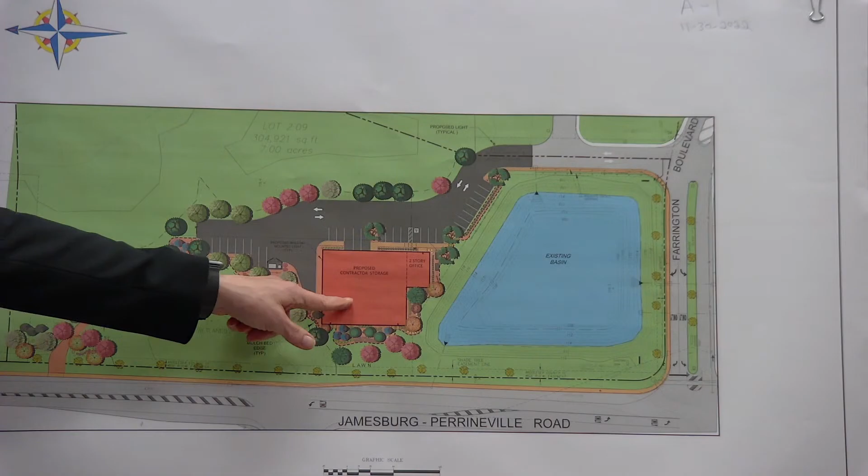And the size of the building — 11,000 square foot storage and 2,880 square feet of office — is a nice size. It's not large, it fits the property well. We're mitigating the lack of buffer by providing lots of landscaping right around the building. When you come from the north, you'll be looking through the wetlands areas and buffers as they grow up, as well as the landscaping located along the fence by the parking lot.

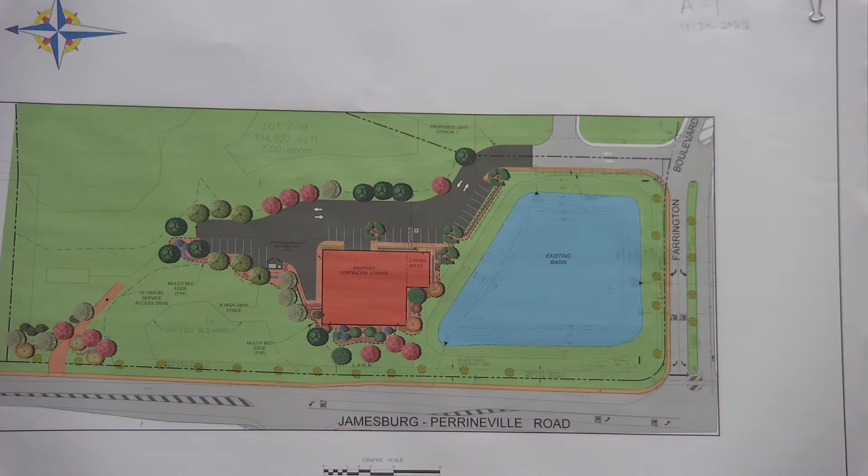So it will buffer you from all the vehicles that might be parked there. And then you have the building, a nice looking building as Mr. Radosti described, softened with landscaping. We've also agreed to fill in any gaps with additional landscaping. Coming from the south going north, you've got the detention basin that gives a great feeling of space. So I think this is a unique site in its shape and configuration, and there's a lot of openness even though we're not providing that extra 40 feet of landscape buffer. So I believe you can grant that without substantial detriment to the public good, or to the zone and zone plan, because it's a fairly unique site in the town.

Any questions? Oh, number of signs, I totally forgot signs, but go ahead please. I was going to bring up a couple more variances. So to confirm, the number of monument signs proposed is 2, whereas 1 is required. Also, I think it's a technical variance where no use, activity, or sign is permitted in the buffer, and I believe the monument signs are being proposed in that buffer area. Yes, I have them listed, I just forgot to say them. Thank you, okay.

And the other variance was the loading stall size. I think 10 by 30 is being proposed, where 12 by 50 is required. We do have one that's 12 by 50, and that would be the truck parking area. That's the trailer parking, right? You'd only park a trailer there to unload. And then you need 2 loading spaces, so one of them won't be meeting, so it's a 10 by 30. Okay, I see your point. Yes, so those were the additional variances.

And one waiver, I know you looked at me and I confirmed those were the variances. Again, fences are required to be within 6 inches of the property line. I understand here fences are being proposed to the interior of the site. Again, in my opinion, it does enhance the property. It's a technical waiver, but just to put it on record, it's a design waiver too. I had that one listed also, design waiver for the fence. Fencing and guardrails have to be located within 6 inches of the property line, and we're proposing that they be further into the line. Okay, usually it's the other way around, they're too close to the property line. I know. Okay, well, and then the final one was the lot width, which we can't change.